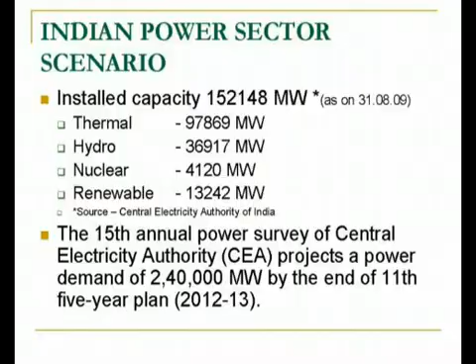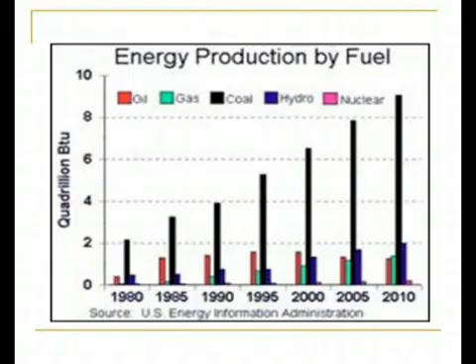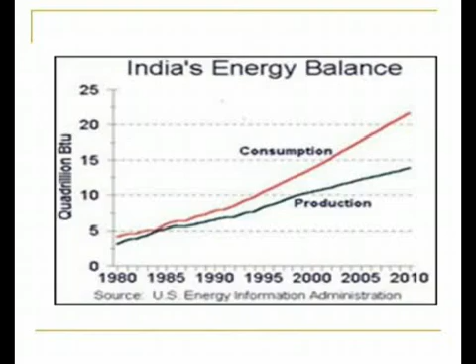This chart shows the graphical representation of the consumption and production of power in India. As you can see, the gap between consumption and production is increasing day by day. Now we will see what are the sources of energy. There are two sources of energy, renewable and non-renewable. As the name suggests, non-renewable sources of energy are exhaustible in nature. Once they are used, they cannot be regenerated.

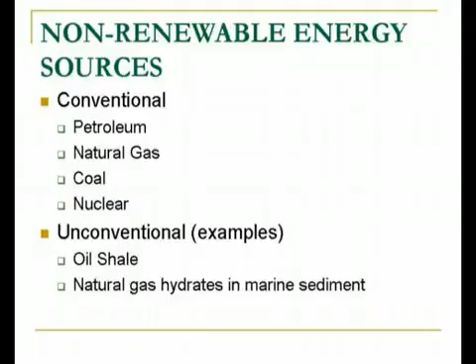The most common examples of non-renewable energy sources are petroleum, natural gas, coal, and nuclear. Of these, petroleum and coal are the major sources as far as conventional non-renewable energy sources are concerned. There are certain unconventional non-renewable energy sources also, that is oil shale and natural gas hydrates. But mostly petroleum, natural gas and coal are used the world over.

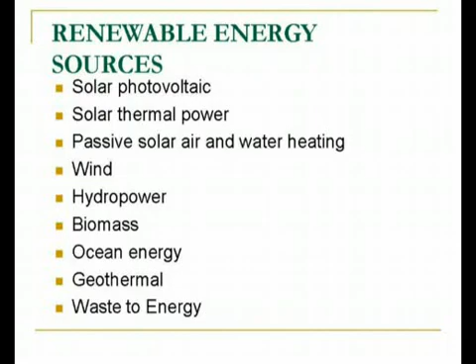Now we will see renewable energy sources. As the name suggests, these can be regenerated, renewed, and they are virtually inexhaustible. The types of renewable energy sources are solar, which constitutes solar photovoltaic and solar thermal power, then wind energy, hydropower energy, biomass energy, ocean energy, geothermal energy, and waste to energy, meaning the waste generated can be used to generate energy.

There are three primary sources of energy. The three independent primary sources providing energy to the earth are the sun, geothermal forces, and planetary motion in the solar system.

Earth receives basic energy from the sun. Then there are geothermal forces inside the crust of the earth, which result in heating up of magma and rocks. That is also a source of energy. Another is planetary motion in the solar system, like the gravitational pull of moons, which results in tides on Earth.

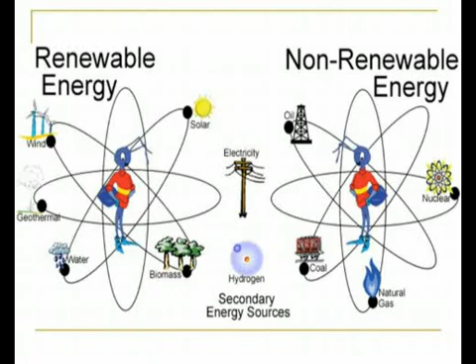This plate shows various sources of renewable energy and non-renewable energy. As you can see, there are two distinct entities, and our renewable energy is having wind, solar, geothermal, water, biomass.

Now, why do we need alternative energy? As I was discussing, the demand for energy is increasing day by day, and our sources are limited. As we consume petroleum, a day will come when we will be exhausting all the sources. So it is very necessary to search for alternatives right from this stage, because fossil fuel reserves are very limited.

Population is also increasing. India's population is increasing, and with the population increase, requirement of energy is also increasing. So we have to meet that additional energy demand also. For that, we need to search for viable alternative solutions for energy requirement.

India imports around 110 million tons crude annually. So a major chunk is being spent as foreign exchange towards meeting energy requirements. Moreover, 52% of households and so many villages are unelectrified. So we have to search for alternatives so that maximum number of villages can be electrified in a viable manner.

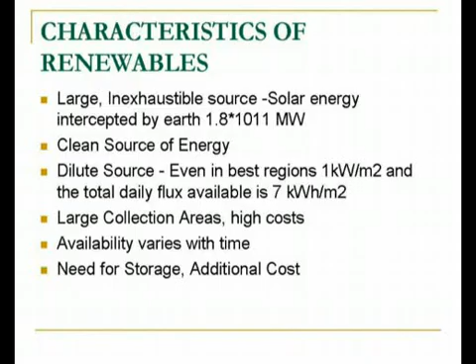Then large collection areas, but at the same time, these renewable energies also have high capital costs, and the major disadvantage is that availability varies with time. For example, wind power. Wind may not be available at all times, so it is highly cyclical in nature. Then there is a need for additional storage because, if we are generating power by wind, we need to store that power also, or evacuate that power and transmit it over long distances to load centers. So these are the characteristics of renewable energy sources.

Now, what are the benefits of renewable energy sources? The major benefit is that they are environmentally friendly. By using renewable energy sources, we will be reducing emissions of carbon dioxide and other pollutants.

Then it leads to local and regional development, because in rural areas particularly, it is not economically viable to supply grid electricity. So for that purpose, we need to have renewable energy there. It will also lead to economic and social development of that area. It also helps in creating jobs locally. Then a major advantage is that it leads to security of energy for a nation.

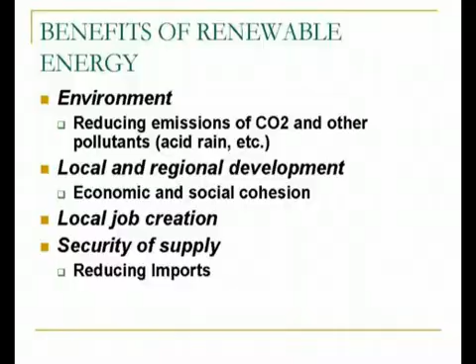These are the various power generation options involved, like centralized grid connected. This is the most popular way. Mostly in India it is employed, but it is restricted only to urban centers. Then another way is decentralized distributed generation, isolated. It means this mode will be isolated from the main supply, and it can be used as a separate system.

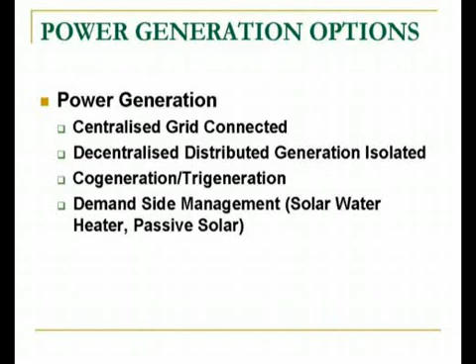Then cogeneration or trigeneration. What do we mean by cogeneration? Cogeneration means that we are using an industrial process to raise steam which can be used for process industry as well as to generate power. And the fourth is demand side management. That is, by managing the loads, we are using less energy, and that way we are helping in generation.

This table shows the potential of renewable energy sources in India and status of installation, that is the potential which has been already harnessed. From this table it can be seen that the maximum potential is for wind power, and that is a sector where we have worked so much, and around 10,000 megawatt has already been commissioned in India. Next is small hydropower, that is up to 25 megawatt. There we have commissioned 2430 megawatt.

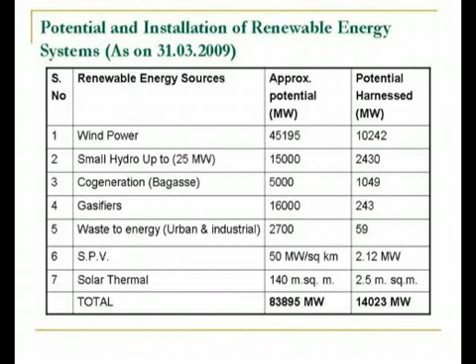Then these are the various sources. The total potential from renewable energy sources in India is pegged at around 83,000 megawatt, of which we have commissioned only 14,000 megawatt as of now. It means there is still a huge potential to realize in renewable energy systems. By realizing this potential, we can meet almost 25% of our total installed capacity.

Now we will discuss various sources of renewable energy one by one. First we will start with wind energy because that is the area where maximum potential exists. India has done very good work in the field of wind energy, and it ranks 5th in the world after Germany, USA, Denmark and UK.

The wind energy potential in India has been estimated at 45,000 megawatt, of which 10,000 megawatt has been installed. Certain states in India have very high wind power potential, like Tamil Nadu, Gujarat, Andhra Pradesh, Karnataka. Nowadays, rapid strides have been made in the technology of wind turbines also, and a single machine of up to 4.5 megawatt capacity is now available, and the average capacity factor of these wind turbines is around 14%.

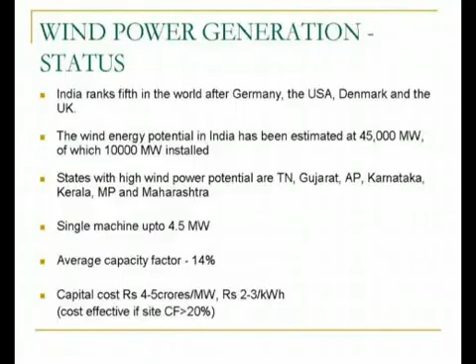So what is wind energy? Its basic principle of operation is very simple. The kinetic energy of wind is converted into mechanical energy, which in turn is used to generate power. Wind turbines are being used since times immemorial. Even in olden days, prehistorically, these wind turbines were used to raise underground water. So this is not a new concept. This is a very old concept.

Turbines catch the wind's energy with propeller-like blades, and usually two or three blades are mounted on a shaft to form a rotor. This concept can be explained in a better way graphically also. In this chart, this is a cross-sectional view of a wind turbine showing various parts. You can see from this chart that the major component of a wind turbine is the rotor. The rotor has got two or three blades.

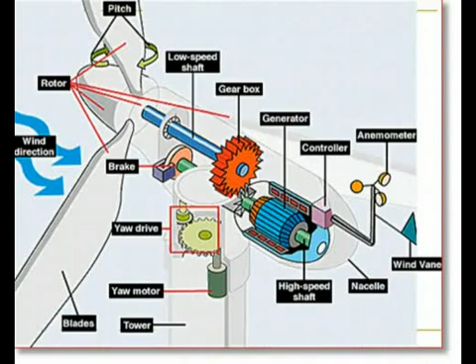Then the shaft of the rotor is connected to a gearbox. That gearbox in turn is connected to the generator, so when the blade turns, it moves the generator also, and it generates power. Other things like controller, yaw drive, etc. are also included to control the speed of the wind turbine.

This is a wind resource map of India. This map shows the existing potential of wind energy across different states. It can be seen from this map that maximum potential is there in Tamil Nadu, Maharashtra, Karnataka, coastal parts of Gujarat, and even the desert area of Rajasthan.

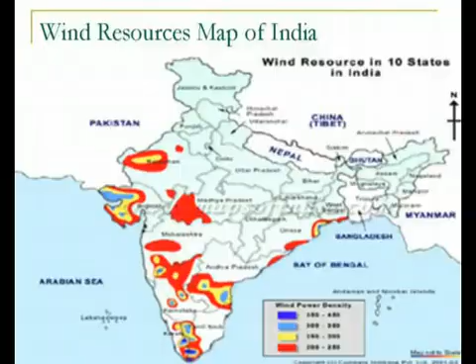So we were talking about the components of the wind turbine, and there are various components like the anemometer. It measures the wind speed and transmits wind speed data to the controller. Then blades. Most turbines have either two or three blades. Wind blowing over the blades causes the blades to lift and rotate. Brake: a disc brake which can be applied mechanically, electrically, or hydraulically to stop the rotor in emergencies.

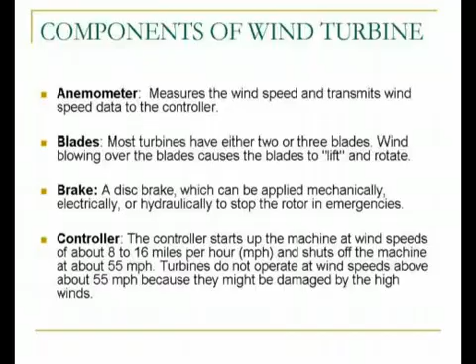Then there is the controller. This controller starts up the machine at wind speeds of about 8 to 16 miles per hour and shuts off the machine at high speeds to prevent damage to the rotor. Gearbox. Basically when the wind blows it drives the rotor, which moves at a very slow speed. So that speed is converted to a high speed through this gearbox.

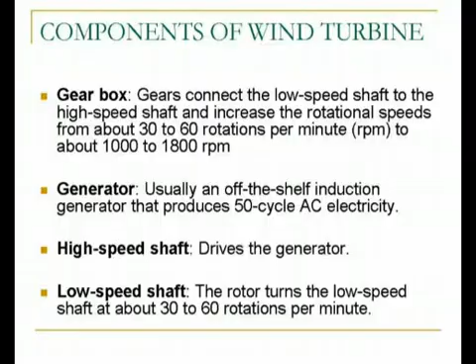Then the generator, usually an induction generator that produces 50 Hertz frequency AC electricity, and there is a high speed shaft which drives the generator. These are the various components of a wind turbine. The towers are made from tubular steel, concrete or steel lattice. It can be of any material. Because wind speed increases with height, taller towers enable turbines to capture more energy and generate more electricity.

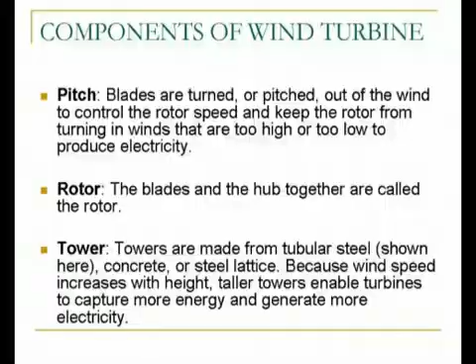What are the advantages of wind energy? It is a clean fuel source. No pollution is involved because you are only utilizing the natural wind which is available. It is inexhaustible; there is no dearth of wind. Then, it is one of the lowest price renewable energy technologies.

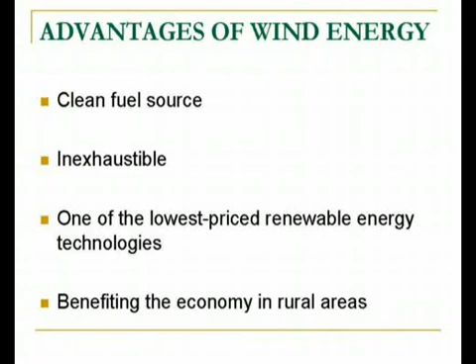Later on we will compare the capital and running cost of all the sources of energy. In that chapter we will see in detail what the pricing is. But this wind energy is one of the lowest price renewable energies, and that is the reason it has been developed in India at a considerable rate, and it benefits the economy in rural areas.

Now, what are the disadvantages? Let us see the disadvantages also. As compared to fossil fuel generators and conventional power plants, it has got a higher initial investment. A major disadvantage is that wind is intermittent and it is very unpredictable. So, wind energy cannot be stored.

It cannot be stored. And good wind sites are often located in remote locations far from cities where the electricity is needed. So a lot of cost is involved in evacuating that power generated from the wind generator and transmitting it over long distances to the load centers.

Another disadvantage is that it may compete with other uses for the land, because the requirement of land is huge for establishing wind power plants. So it may compete with other uses for land, for example farmlands or other uses also.

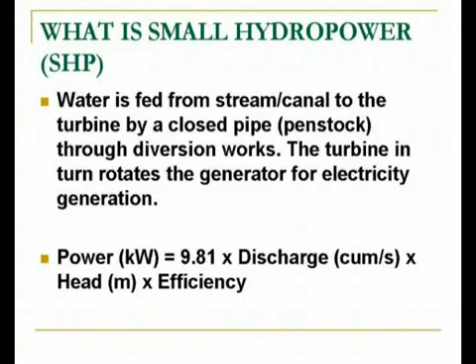There is a formula for how much power can be generated from a small hydropower plant. This formula is given by: power in kilowatts generated is equal to 9.81 into discharge, that is the flow of water, how much water is flowing, into head, from what height this water is coming, into the efficiency of the turbine. This formula gives the power generated.

Advantages of small hydropower. This small hydropower has got non-consumptive use of water. It means that actually we are not utilizing this water, we are just using the kinetic energy of this water to generate power. It also does not require a very large capital investment, and it has got a very short gestation period ranging from 6 to 24 months. So in a matter of around 2 years it can be commissioned.

It has low operation cost also, and not much technical knowledge is required. Unmanned power stations are also possible in this case. It can be connected with the electricity grid, and it can act as a catalyst in promoting socio-economic changes in remote areas. It is definitely more eco-friendly as compared to conventional hydropower, because a lot of environmental concerns are being raised for conventional hydropower. So these small hydropowers are a very good substitute to conventional hydropower.

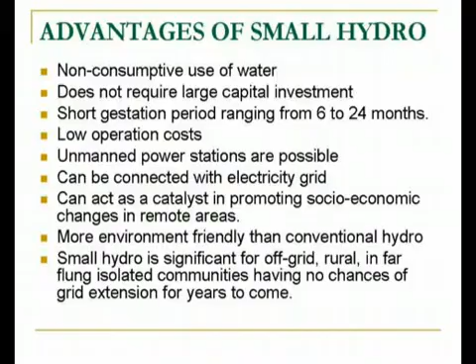And small hydropower is significant for off-grid, rural, and particularly mountain areas, hill areas, where a lot of scope exists for this small hydropower.

Now we will see how these small hydropower plants are classified. Classification based on the capacity. Various countries adopt various systems for classifying these small hydropower plants, but in India we have classified it into 3 parts. One class is micro, when the station capacity is up to 100 kilowatt. SHP whose capacity is up to 100 kilowatt is known as micro small hydropower.

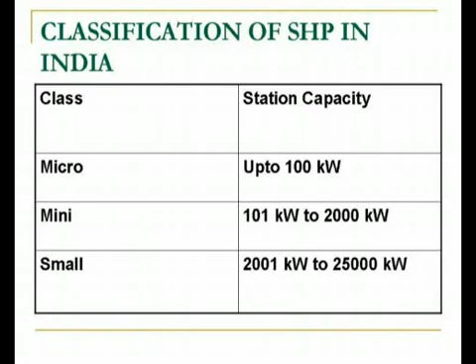Then comes mini. Its capacity ranges from 101 kilowatt to 2000 kilowatt, that is 2 megawatt. 1 megawatt is equal to 1000 kilowatt. And next comes small hydropower. Its capacity ranges from 2 megawatt to 25 megawatt. Above 25 megawatt, all the power projects in the sector are classified under hydropower.

Types of schemes, how these small hydropower projects are constructed. There are three systems actually in this. One is run-of-river based. In run-of-river, the flow of water is utilized to generate the power. So no storage is involved, and the output is of course subject to the instantaneous flow of the river. So if the flow is less, then the power generated will be less.

And reliability of discharge is very much necessary to be established, because if there is no reliability, then the plant factor will go down.

Second classification is canal based. It utilizes the fall and flow in the canals. When we are constructing canals for irrigation purpose, it follows the natural topography of the area, and when there is a natural gradient in the canals, this gradient is utilized to generate power. It can be planned also while constructing the main canal or in a bypass canal. So the drops in the natural gradient of the canal are used for generating power.

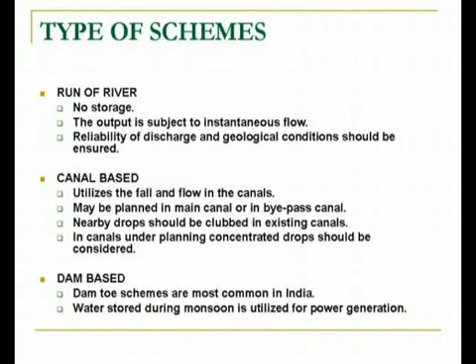Then the third scheme comprises dam-based small hydropower, in which dam toe schemes are most common in India. Here water stored during monsoon is utilized for power generation.

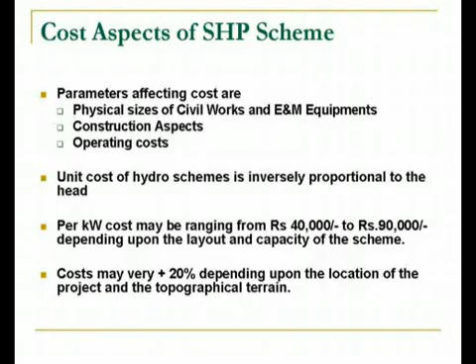Cost aspects of small hydropower. The parameters affecting costs are: the physical sizes of civil works and electromechanical equipment, the construction aspects, and operating costs. These are the three components of project cost. The unit cost of hydro schemes is inversely proportional to the head. That is, higher the head, lesser the cost. And per kilowatt cost may range from say 40,000 rupees to 90,000 rupees depending upon the layout, and it is very location specific.

If we compare small hydro with other renewables, it is the highest density renewable energy source against widely spread and thinly distributed solar energy, biomass, wind resource, etc. And its cost of generation is also cheapest among renewables. The efficiency of small hydro plants is highest among renewables as compared to wind energy or solar energy. The efficiencies are comparatively higher.

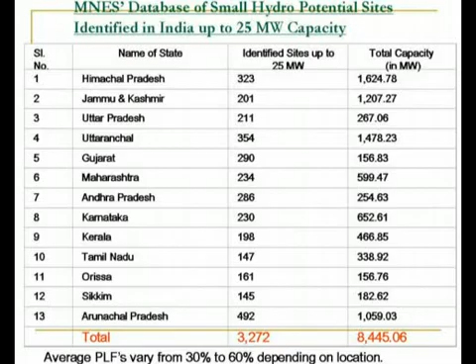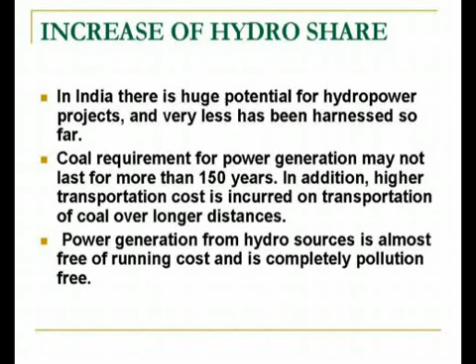This table shows the state-wise sites identified for development of small hydro projects. We can see from this that a total capacity of around 8,000 megawatt has been identified. In India, there is huge potential for hydropower projects, and very little has been harnessed so far. Particularly in hilly and mountain regions, Himalayan regions, in states like Himachal Pradesh, Uttarakhand, Arunachal Pradesh in the northeast, there is a huge scope for small hydropower.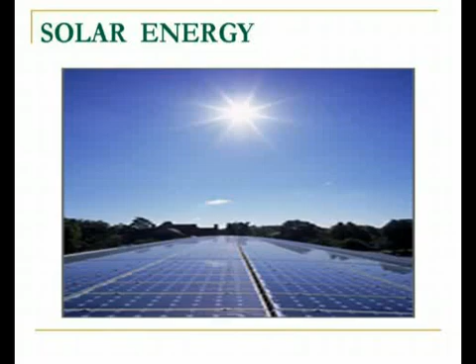Now we will discuss solar energy, the most abundant energy found on earth. Why solar energy? The most obvious reason is that solar energy is the most readily available source of energy on earth. Then it is absolutely free. It is also the most important of the non-conventional sources of energy because it is non-polluting. Earth receives an abundant source of this energy from the sun, and India alone receives solar energy equivalent to 5,000 trillion kilowatt hours per year. Only thing is that we have to devise manners to utilize this energy.

Solar energy can again be classified into two types: passive solar and active solar. Now what do we mean by passive solar and active solar? Passive solar energy is making direct and indirect use of thermal energies from the sun. Like a southern exposure of a building guarantees the maximum exposure to the sun's rays, and special metal leaf covering over windows and roofs can block out the sun during the summer months. So these are examples of passive solar energy uses.

Active solar energy is the use of the sun's electromagnetic radiation in generating electrical energy. This active solar energy can further be divided into two forms, that is solar thermal and solar photovoltaic. Solar thermal is used for heating applications and solar photovoltaic is used for electricity generation.

Solar thermal. Solar thermal is employed for collecting and converting the sun's energy to heat energy for applications such as water and air heating, cooking and drying, steam generation, distillation, etc. Basically, a solar thermal device is nothing but an absorber of the sun's heat energy, a heating or heat transferring medium, and a heat storage or heat tank.

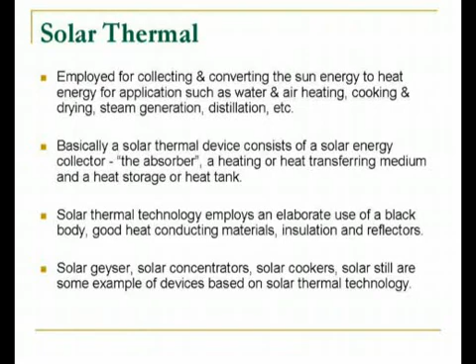So what is happening is that the transferring medium is getting heated by the sun's energy, and we are utilizing that heat. Solar thermal technology employs an elaborate use of a black body, because a black body absorbs the heat, good heat conducting material, insulation and reflectors. Solar geyser, solar concentrator, solar cooker, solar still are some of the examples of devices which are based on this solar thermal technology.

Solar photovoltaic. Solar photovoltaic technology is employed for directly converting solar energy to electrical energy by using a silicon solar cell. It is commonly known as SPV, solar photovoltaic. Solar photovoltaic has found wide application in rural areas for various important activities besides rural home lighting.

Remote villages deprived of grid power can be easily powered using solar photovoltaic technology, and it can thus revolutionize the concept of making power available in remote and far-flung rural areas. The economics of rural electrification can be attractive considering the high cost of power transmission and erratic power supply in rural areas.

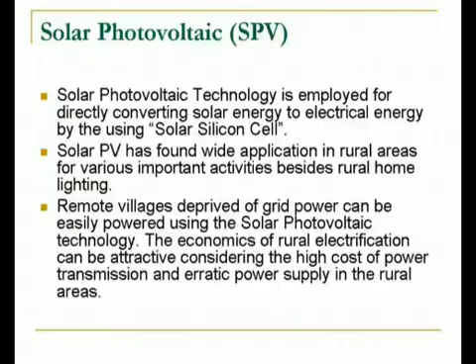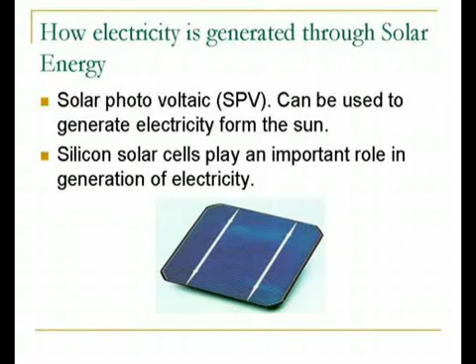How is electricity generated through solar energy? Now we will see that solar photovoltaic can be used to generate electricity from the sun. We are using a silicon solar cell, which is made of silicon. It plays an important role in generation of electricity. A solar cell is nothing but a PN junction, positive and negative PN junction.

As you can see from this movie clip, it will explain the concept of how electrical energy is being generated by solar energy. Sunlight is made up of tiny packets of energy called photons. Every minute, enough of this energy reaches the Earth to meet the world's energy demand for a whole year. Photovoltaic panels consist of many solar cells. These are made of materials like silicon, one of the most common elements on Earth.

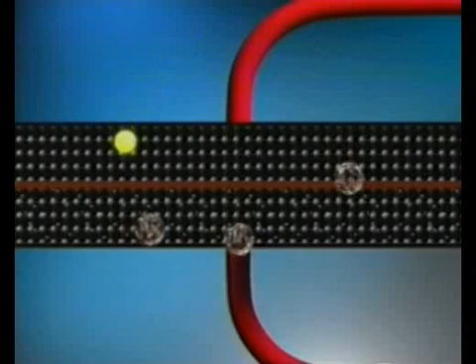The individual cell is designed with a positive and a negative layer to create an electric field, just like in a battery. As photons are absorbed in the cell, their energy causes electrons to become free. The electrons move toward the bottom of the cell and exit through the connecting wire. This flow of electrons is what we call electricity. By combining solar cells and photovoltaic panels, we can produce just the right amount of electricity to perform a specific job, no matter how large or small.

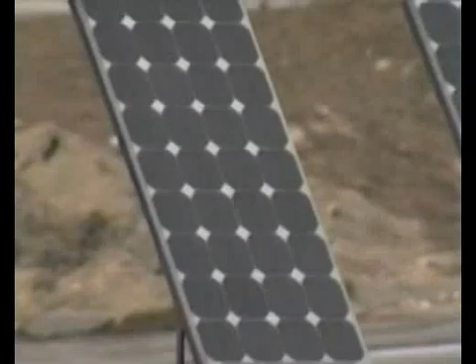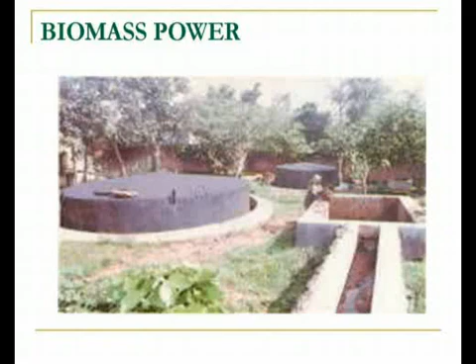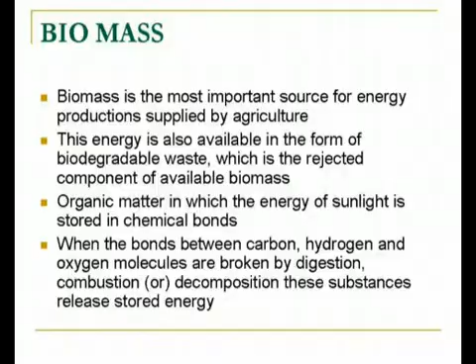Organic matter in which the energy of sunlight is stored in chemical bonds. When the bonds between carbon, hydrogen and oxygen molecules are broken by digestion, combustion or decomposition, these substances release stored energy. There are various classifications of biomass. One is biomass grown, that is plantation. The other is agricultural waste, like straw, husks. Then there is animal waste, for example, cow dung. Then industrial waste like bagasse, dry waste. And the last is municipal waste, that is garbage and night soil.

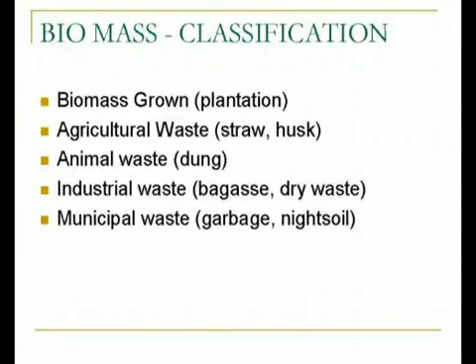Biomass is currently the world's fourth largest energy source. India produces around 540 million tons of crop and plantation residues every year. Higher capacity factor: these biomass plants have higher capacity factors than other renewables. And atmospheric gasification with dual fuel engine occurs. A 500 kilowatt gasifier is the largest installation in this field as on date.

Bagasse-based cogeneration is another aspect of biomass power. What is bagasse? Bagasse is nothing but the residue left when the juice of sugarcane is extracted. This byproduct of sugarcane juice extraction, that is bagasse, is used for generating power. First of all, this dried up mass is used in boilers to generate steam, and that steam is used in the process industry like the sugar industry, and the surplus steam is used for raising power.

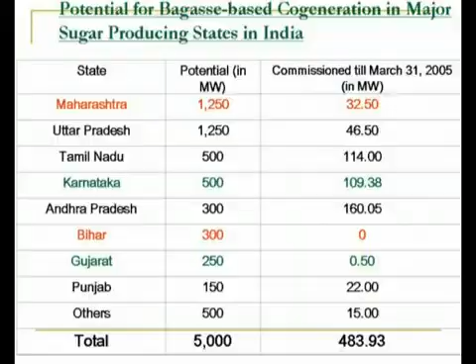So it is a very important concept for a sugar producing country like India, and in a lot of states, the sugar industry has already commissioned bagasse-based cogeneration plants. Thereby they are meeting their own power requirements, and the surplus power is being fed to the central grid. This table shows the state-wise potential of bagasse-based cogeneration plants. States like Maharashtra and Uttar Pradesh, which are leading producers of sugar, have a lot of potential. The total potential is pegged at around 5,000 megawatts. This is a plate showing a typical bagasse cogeneration power plant in Tamil Nadu.

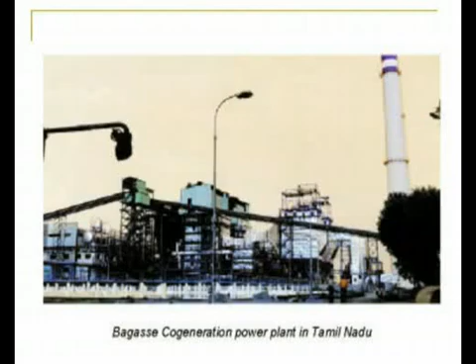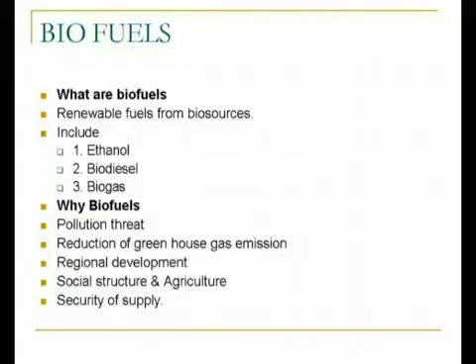Now we will discuss biofuels. What are biofuels? Biofuels are renewable fuels from biosources. They include ethanol, biodiesel and biogas. A lot of talk is being generated on biofuels nowadays, and why should we be using biofuels? Because by using biofuels, there is reduction of greenhouse gas emission. Then there is security of assured supplies. Biodiesel is very environment friendly, and it is a renewable fuel. No engine modification is required, it is non-toxic, and it is easy to handle and store as compared to other combustion fuels.

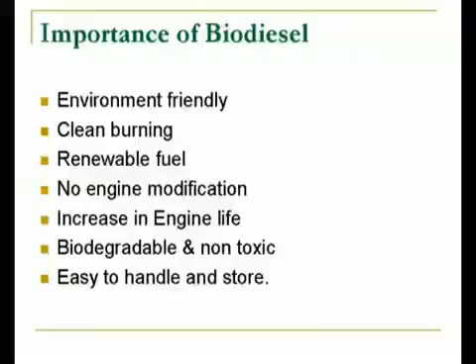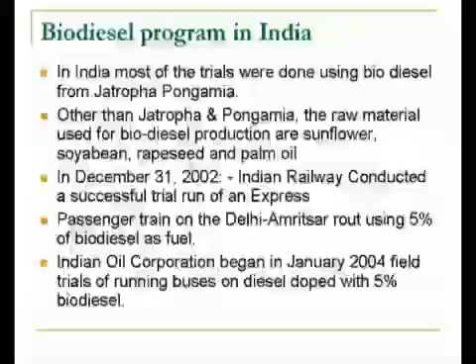In India, most of the trials were done using biodiesel from Jatropha and Pongamia. Other than these, the raw materials used for biodiesel production are sunflower, soybean, rapeseed, and palm oil. In 2002, Indian Railways conducted a successful trial run of an express using biodiesel, and a passenger train on the Delhi-Amritsar route is using 5% biodiesel as fuel. Indian Oil Corporation has also begun field trials of running buses on diesel doped with 5% biodiesel. All these examples show the increasing use of biodiesel in our country.

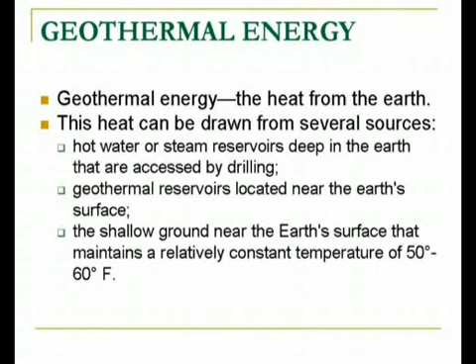Now we will discuss in brief about geothermal energy. Geothermal energy, as the name suggests, is the heat from the earth. Geo means earth, thermal is heat. This heat can be drawn from several sources, like hot water or steam reservoirs deep in the earth that are accessed by drilling, geothermal reservoirs located near the earth's surface, and the shallow ground near the earth's surface that maintains a relatively constant temperature of 50 to 60 degrees Fahrenheit.

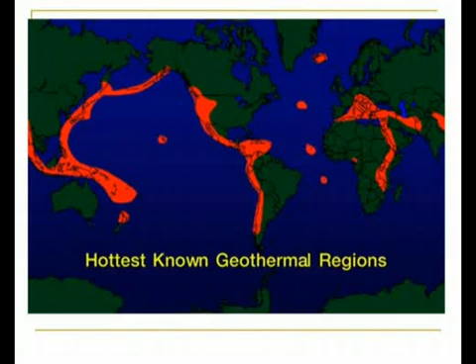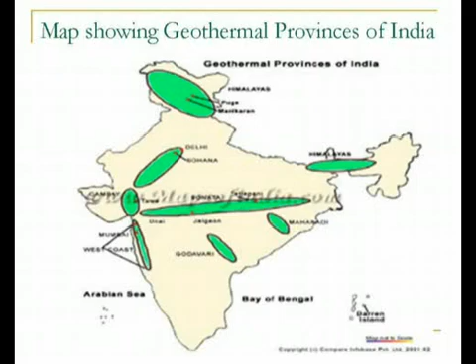This is an artistic view of how a geothermal power plant works. From this figure, you can see that there is a production well and there is an injection well. So wherever these geothermal activities are found, and where it is established that hot water is available, that water is drawn by drilling a well. That water is used for raising steam, and the steam in turn is used for generating power, and the same water is again injected back so that there is non-consumptive use of water.

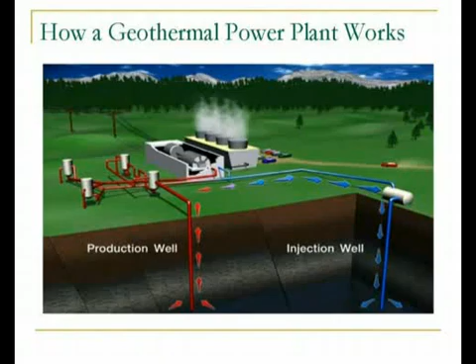Now we will discuss tidal energy. Tidal energy traditionally involves erecting a dam across the opening to a tidal basin. This dam includes a sluice that is open to allow the tide to flow into the basin. The sluice is then closed, and as the sea level drops, traditional hydropower technologies can be used to generate electricity from the elevated water in the basin. Tidal range may vary over a wide range, that is 4.5 to 12.4 meters, and it depends on site to site. A tidal range of at least 7 meters is required for economical operation and for sufficient head of water for the turbines.

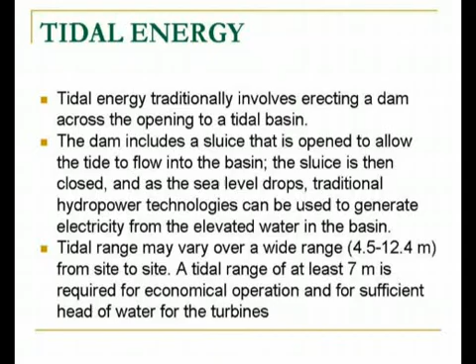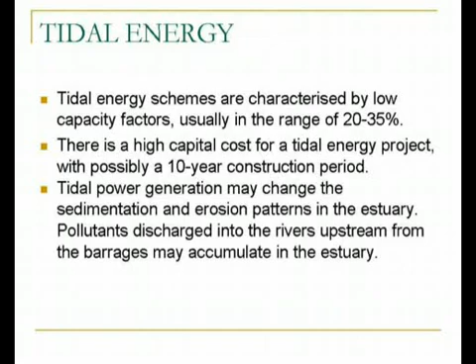Tidal energy schemes are characterized by low capacity factors, usually in the range of 20 to 35%, and there is a high capital cost for a tidal energy project with possibly a 10-year construction period. Tidal power generation may also change the sedimentation and erosion patterns in the estuary, and this is an added disadvantage. And pollutants discharged into the rivers upstream from the barrages may accumulate in the estuary. So these things have to be taken into consideration while designing a tidal power project.

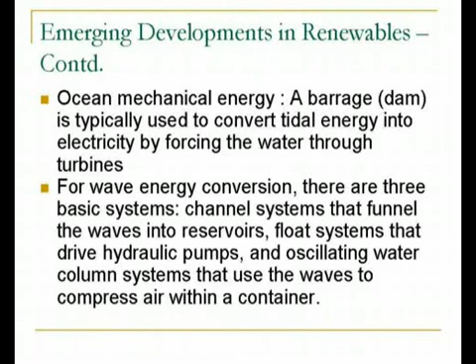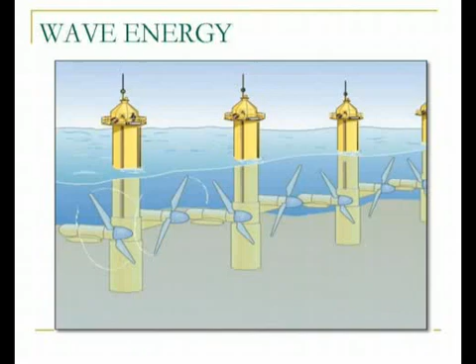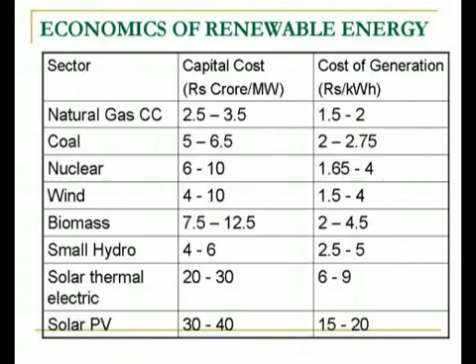The value ranges typically from 20 to 30 crore rupees per megawatt, and solar photovoltaic is still costly. It ranges from rupees 30 to 40 crores per megawatt, whereas small hydro is very much comparable with the contemporary thermal coal power plants, and it is in the range of rupees 4 to 6 crore per megawatt. Wind is also comparable to small hydro. Now, as far as cost of generation is concerned, the cost of generation of solar photovoltaic energy is highest. It runs in the range of 15 to 20 per kilowatt hour, that's per unit. Whereas wind and small hydro are quite cheap.

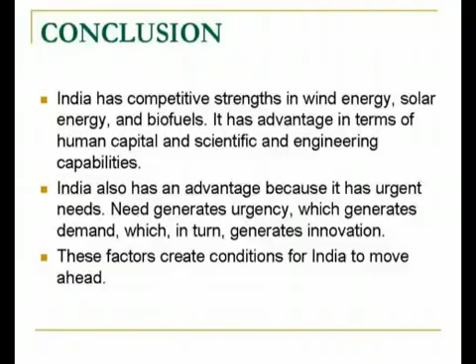Now we will conclude this session. You can see that India has competitive strengths in wind energy, solar energy, and biofuels. These are the three areas which we should concentrate upon to maximize the potential from these three sources of renewable energy, that is wind energy, solar energy, and biofuels. India also has an advantage because it has urgent needs, and to minimize the gap between requirement and availability of power, we need to rapidly search for alternative, viable energy sources. So these factors create conditions for India to move ahead.

The government cannot do everything; however, individual or cooperative efforts can do a lot. Many rural communities consume little electricity, and extending electricity grids to meet their energy needs will prove more costly and take longer than harnessing new and alternative sources of energy already available in these communities, like wind, solar, and biomass. The attraction of these sources lies primarily in their abundance and ready access.

The renewable energy technologies for exploiting these sources include biogas plants. All these areas are very relevant and may prove very useful for providing energy security for our rural areas. For example, biogas plants, solar lanterns, solar home lighting systems, improved cooking stoves, improved lanterns, solar water pumping systems for irrigation, solar water heating systems, and water mills. These technologies can be readily used in rural areas for maximum utilization.

So we have seen that by using these renewable energy options, we can have all these advantages. It provides better lighting. Better lighting enables the poor to stretch their period of economic activity. The children can help them in daily chores and then study in the evenings. And it is very environment friendly. Efficient use of conventional sources of energy or use of renewable energy helps save the environment from further degradation and gives it an opportunity to regenerate.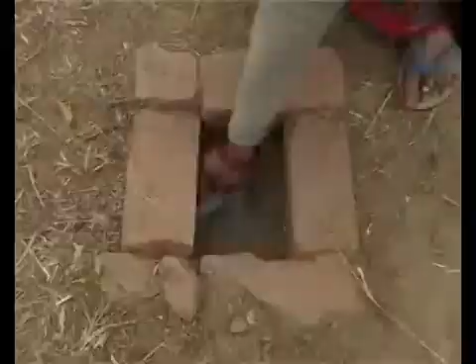In a situation where the people's daily firewood requirement outstrips the annual incremental biomass growth in the forest areas, the only logical solution seems to be the provision of an alternate source of energy. Over the past 15 years, Grassroots has been able to demonstrate the viability of an alternative by construction of household-level biogas units as a renewable energy option.

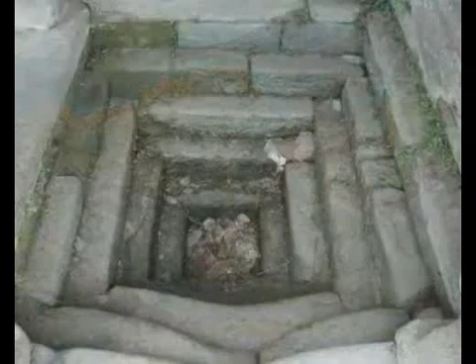These provide clean, smokeless cooking gas and thereby have a positive impact on family health, besides reducing the biotic pressure on the forest resources. Depletion of forest cover also has an adverse effect on the recharge of subsurface groundwater, which in turn leads to drying up of natural springs in the region. This means that women and children need to spend even more time and energy fetching water from distant sources.

Fossil-based fuels like LPG, kerosene and coal are non-renewable and expensive. A large amount is spent by the government annually in subsidy and transportation of such fuels.

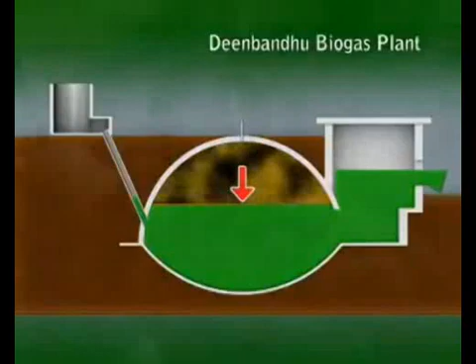In the absence of oxygen, certain bacteria found in cow dung break down this mixture to produce methane, which rises to the top of the dome and is piped to the kitchen to be used as fuel. This cycle is continuous and a fresh mixture is introduced every day. When gas is formed in the dome, it increases the pressure inside. The increased pressure pushes down the mixture, causing the level of spent mixture to rise in the outlet tank, from where it moves out in the form of slurry. This slurry is mixed with dried leaves, leftover fodder and stalks to produce excellent organic manure.

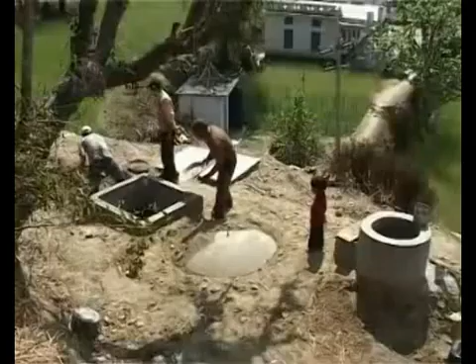In colder climates, like the higher reaches of the Himalaya, the Deenbandhu fixed dome model is ideal because the digestion chamber is underground, providing good insulation against the cold. We use a design optimized for a longer 55-day cycle so that the mixture gets more time for digestion. Care is also taken to choose sites that receive at least 2 to 3 hours of sunlight in winter. We have found that while the production of gas does reduce by about 25% during 3 months in winter, the plants function very well, and a 1 cubic meter plant provides 3 to 4 hours of clean cooking fuel every day.

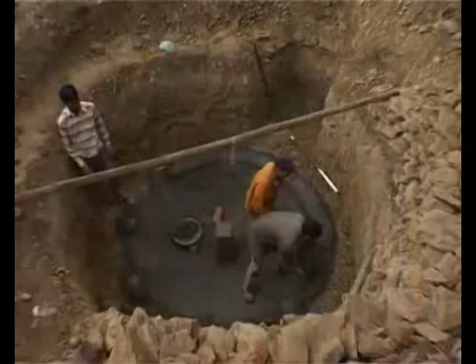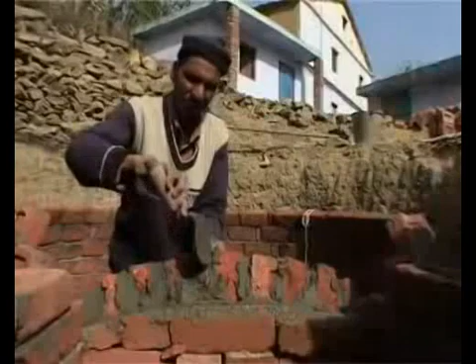In order to expand the use of such appropriate technology applications in the Himalaya, we trained young men from local communities to construct and maintain these plants. This has grown to become a dedicated body called the Kumaon Artisans Guild, with over 50 barefoot engineers. The guild has so far constructed 1,400 household-level biogas plants in 8 districts of Uttarakhand and Himachal Pradesh, enabling these families to reduce their dependence on firewood or other fossil fuels for cooking.

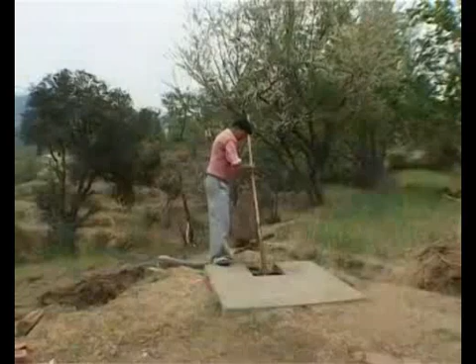We have found that the critical factors for success with biogas are ensuring quality during construction and training user groups in the correct use and maintenance of their plants. Ignoring these critical issues often leads to the failure of biogas plants, perpetuating the myth that biogas technology is inappropriate in the Himalaya and elsewhere in the country.

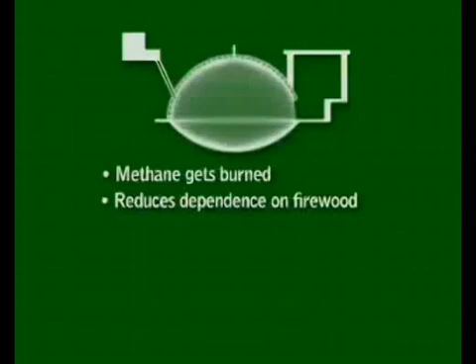The main advantages of using biogas are: methane, one of the greenhouse gases responsible for global warming, gets burned. Households using biogas need very little firewood, reducing the pressure on our fragile forests. It reduces the drudgery of collecting and carrying firewood daily for women, freeing up time for other activities. It is smokeless and thus has a positive impact on family health. There are no recurring costs. The cow dung used is not lost, as the composted slurry makes a much richer organic manure.

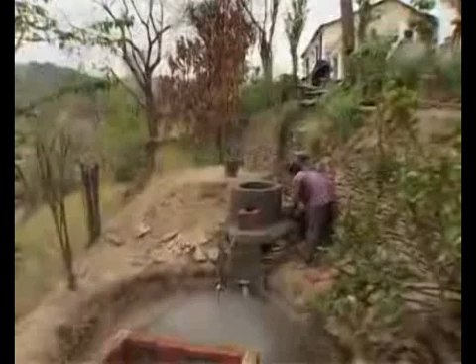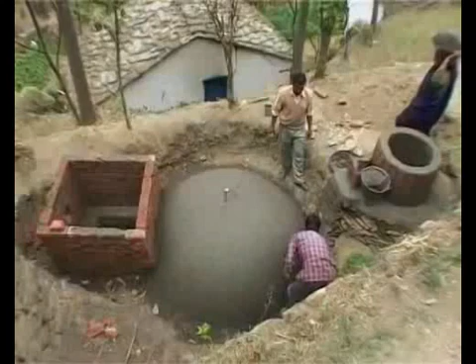The challenge is to scale up the adoption of this technology to help protect the existing forest cover and allow revegetation efforts to succeed. A 1 cubic meter plant currently costs 15,000 rupees in hilly areas. With per capita income of mountain communities being low, the initial cost becomes a major obstacle in the spread of this technology. Households usually contribute about 70% of the cost in cash plus labor inputs. Grassroots has been providing the rest through a small government subsidy and donations from civil society.

At a time when the whole world is waking up to the realities of climate change due to burning fossil fuels, and there is talk of carbon credits for the reduction of greenhouse gases, we must look at biogas with renewed interest if we are serious about providing clean domestic energy as part of our Millennium Development Goals.